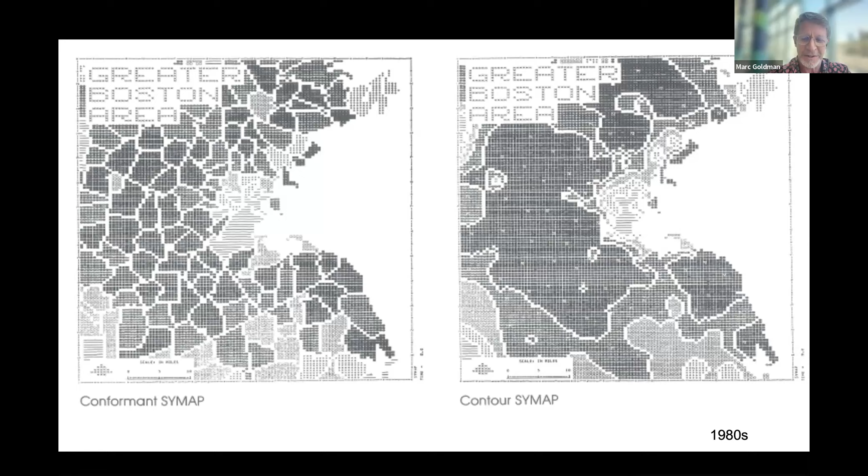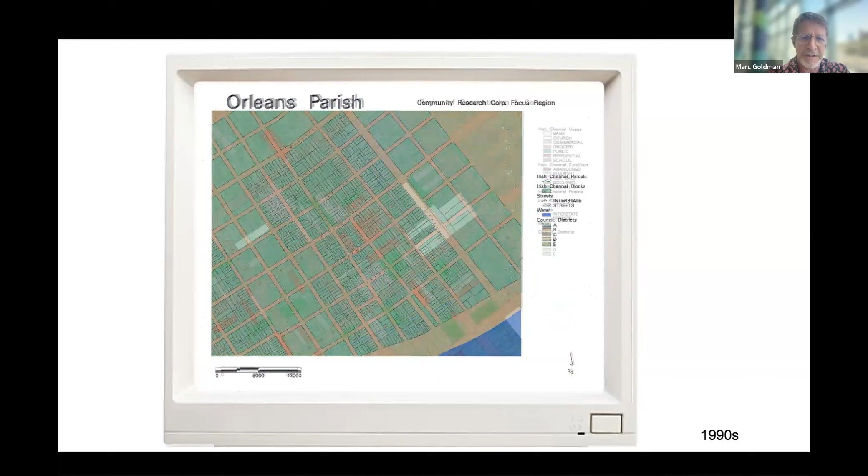Around that same time, I actually got my hands for the first time on GIS. I was in Louisiana - I went to school at Tulane University and was asked to work on a project bringing together CAD floor plans and incorporate them onto some maps showing where properties could potentially be converted from defunct, dilapidated, abandoned properties into

potentially community resources for churches or for schools or for playgrounds. And just the effort to bring the most basic CAD into the time's most probably advanced GIS took weeks, literally weeks of DXF exporting and coordinate resolution and transformations and rubber banding of the images underneath. It was just an absolute challenge.

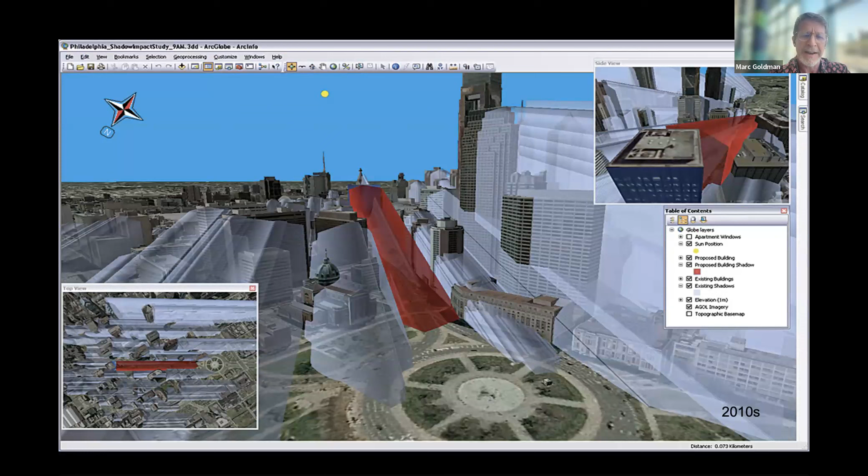Here we are around that same time as CAD started to become more than just basic lines, arcs, and circles and blocks, but actually multiple scales, multi-views, paper space, and model space all combined. In that same era, the 2010s or so, GIS started to get into 3D, but not nearly the quality that we'll see today, and you'll see in some of my examples. Roughly the same time frame.

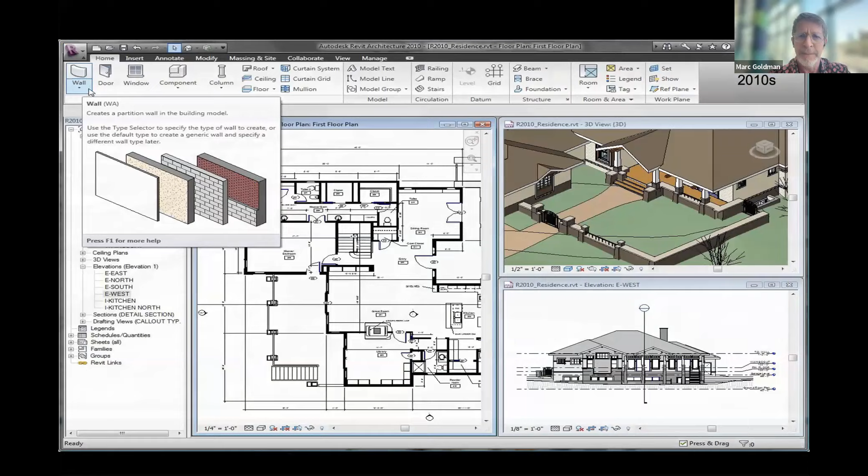My path to GIS was probably like many folks in the AEC industry. It was on the sidelines. You had your heads down in your CAD and BIM and scheduling software, and GIS was at best known to be a mapping tool, but it's come so far in those years.

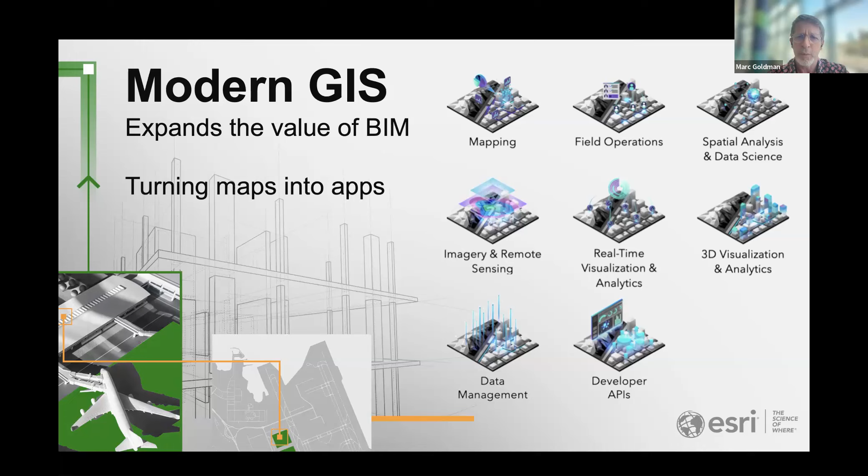We're still generating maps, but those maps become apps, and those apps lead to insights and dashboards and decision-making. We're just so much more than the basic mapping capabilities, as you'll hopefully see from a couple examples that I've shown and more that I'll be showing here. Over the last decade or so, Esri has been investing in integrating BIM with the flagship product ArcGIS.

Beginning with the ability to import through an ETL type of workflow into our main desktop product, ArcGIS Pro, that has evolved over the years as we've strengthened our partnership with, amongst others, Autodesk, who we have a very strong relationship with, and we're reading Revit files directly, DWG files, and certainly IFC files as well.

Those came around just a few years ago, and we have invested significantly in people and energy and commitment to buildingSMART International, buildingSMART USA. I think you'll see in a few examples that I'll show in some live scenes how well we are bringing in IFC data from various authoring applications into our scenes.

And then you're going to see some great examples from Michelangelo from ACCA Software, who's really going to, I think, blow your mind.

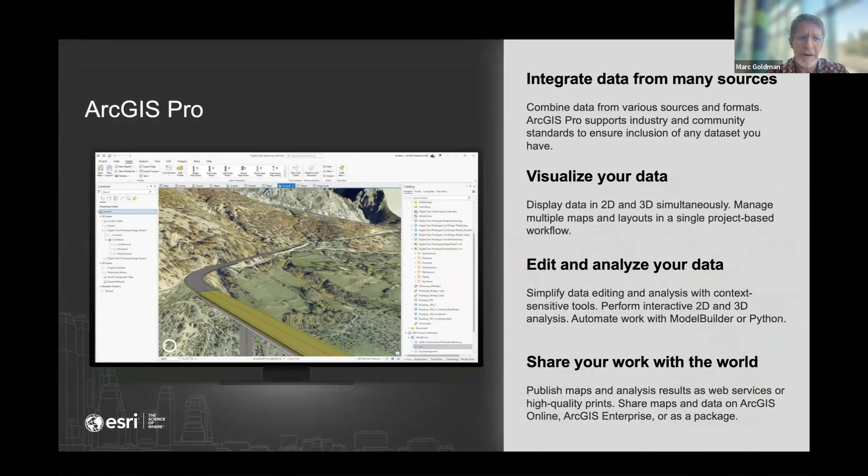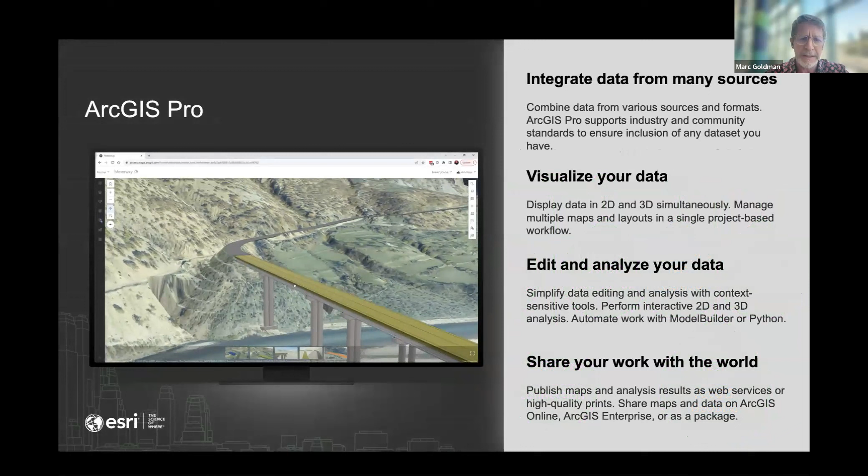So ArcGIS Pro, I've mentioned it a couple of times. My philosophy is if you're using a BIM or CAD application, a product like ArcGIS Pro right next to that, pulling it out of your toolbox to take that CAD and BIM information, combine it with satellite imagery, combine it with reality capture data, combine it with literally thousands of layers of data that you might want to use to understand the project better.

To get a context of your designs in the real world with layers of information, which might typically be non-graphic, census data, traffic flow, weather patterns. That type of information combined with your designs really just opens the door to better visualizations, better deliverables, and the ability to share. We developed a product about 2 years ago now called ArcGIS GeoBIM, which takes the 3D content you might create in the likes of a Revit or other modeling applications.

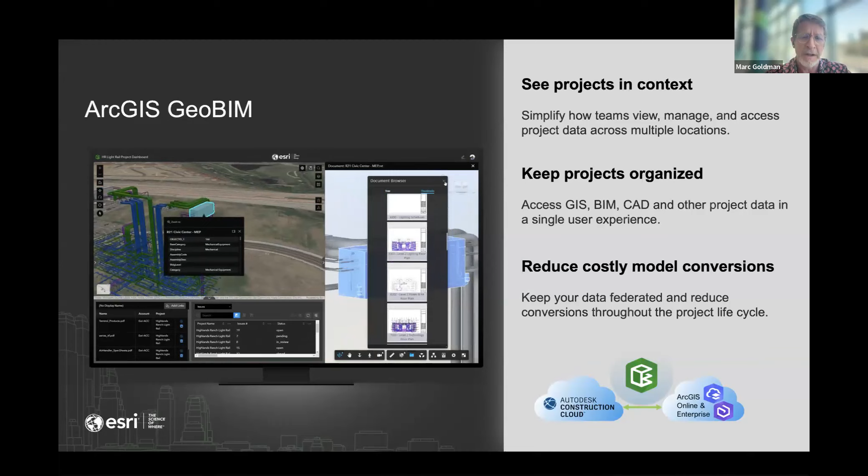And connects the Esri cloud, ArcGIS Online, to, in this case, the Autodesk Construction Cloud or BIM 360, so that on the left side you're looking at a map-like view with all of the context, and on the right side view, you've got the Autodesk Platform Services, the Forge viewer that allows you to interrogate, understand, access all of the other documents that might be connected to your project.

So again, delivering on that concept of digital twin, various layers of information, various scales of information in near real time through a single application that is not just the proprietary formats, but also IFC is consumed and read and understood in GeoBIM.

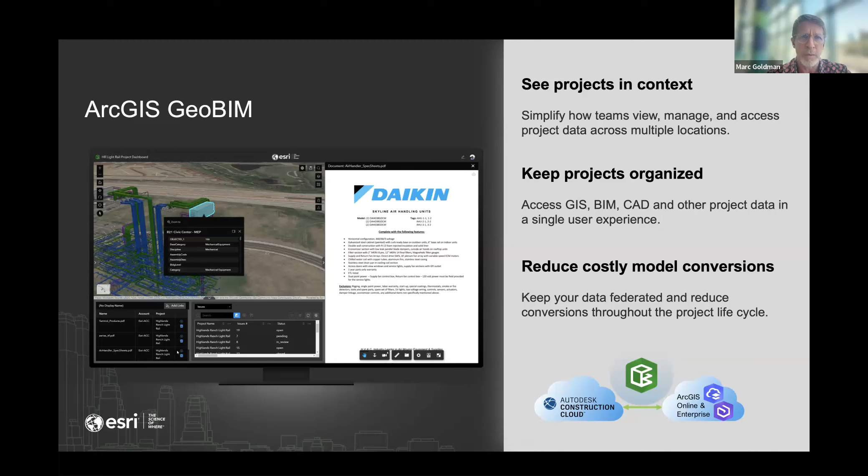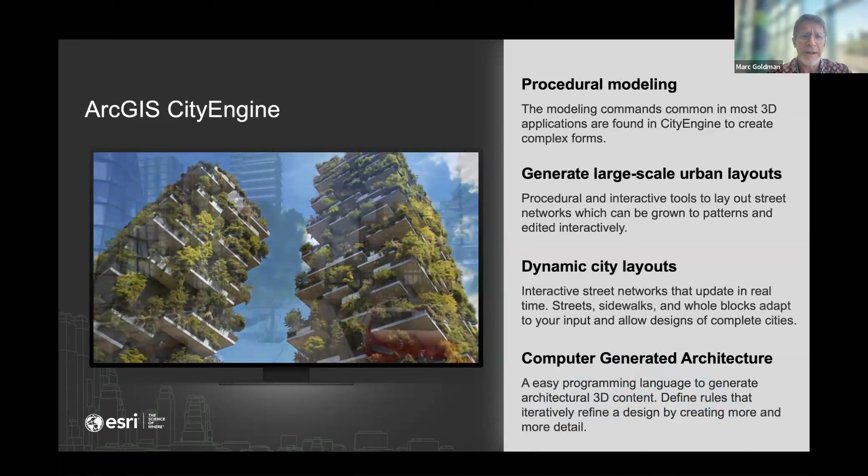And then another application that has really caught my eye at Esri called ArcGIS CityEngine, that is a parametric computer-generated architecture modeling application for city scale, multi-blocks, regions, entire cities, modeled out with parametrics. And it also reads and writes IFC formats, a little bit behind Pro, which is up to 4.3 addendum 1, I believe. CityEngine is still at 2x3, but I'm pushing to make that the latest and greatest, 4.3, 4.4.

So why are we putting this energy into GIS for AEC? I've kind of touched on it, that the context of planning, designing, constructing, eventually operating capital projects, assets are based on spatial information. The idea of these projects existing somewhere along that life cycle is something we sometimes kind of gloss over.

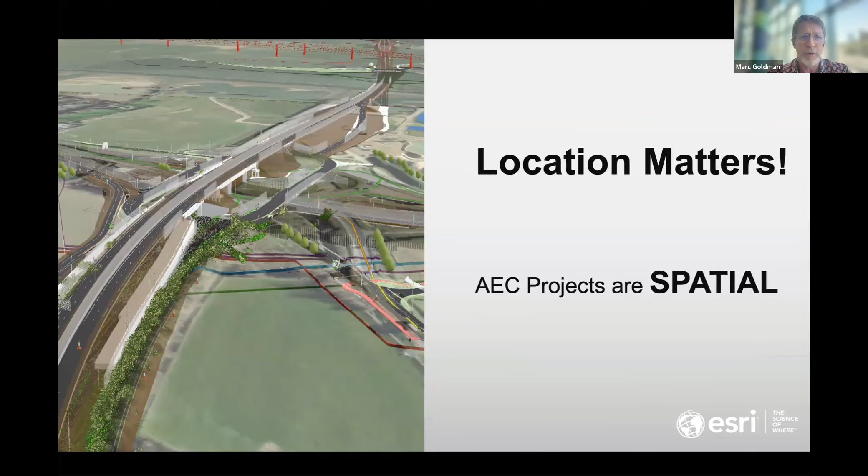The design and engineering tools that typically are used start with a blank screen, but if you could bring in a map, if you could bring in some of those layers of information to help inform those earliest decisions that you make before you put a line on screen that represents a wall or a roadway or a bridge, your first decision is going to be more informed.

GIS also acts as this integrator of content. I can't really think of an industry, a set of professionals who deal with more ranges of information, types of data, complexity of information than those who are involved in building out our infrastructure.

You know, CAD data is very complex. BIM information adds a whole other level of complexity. Schedules that need to be understood in Gantt charts and various types of visualizations. All the PDFs that need to have information extracted from them. Spreadsheets, and I can just go on and on of all the information.

Point clouds, photogrammetry. GIS brings that together, and location acts as a common denominator to bring information into a single view to be analyzed. And what I've seen over the few years here at Esri, I've been at Esri now for about 4 years, is that when you're able to bring data together, you end up bringing people together.

So no longer are you just throwing your information over the fence, hoping that it can be understood as a file, but you're actually connecting around services, web services, data services. It enables, and it requires, a level of communication and collaboration, which is the driving force, I think, of the digital transformation that's happening in this industry.

And I don't just mean going from perhaps paper to dumb PDFs, but actually changing workflows around data and digital workflows so that information is retained and maintained and persists and becomes this golden thread, to use a buzzword, typically related to digital twins throughout the entire project lifecycle.

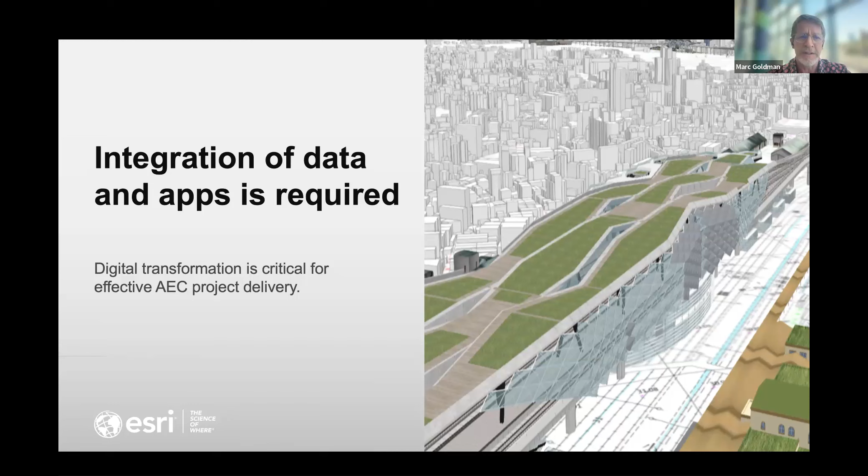And I think that gone are the days of tech shaming our industry, of feeling ashamed for the lack of adoption of tech amongst AEC professionals. I think those days are gone. I've seen it statistically, I've seen it anecdotally, and I've certainly seen it with the solutions that are coming out from Esri and all the partners that we work with.

So with that, I want to jump over to a live app that I put together. This is using a solution called Story Maps that allows you to bring together maps and web scenes and images and videos and timelines, and certainly lots of text to help tell your story.

So what I've done here is I've worked with one of our project engineers who is much more fluent on our software than I am to put together a few scenes, but I actually got to admit, I've done a fair bit of these maps myself.

So this is a scene in San Francisco where I've just taken, picked a region, picked a base map that in this case is imagery, and zoomed in on a portion of San Francisco along the Embarcadero that you can see what I know is Pac Bell Park. I think it's Oracle Park. I don't even know the name of the stadium now.

But I simply chose to use the open source OpenStreetMaps 3D buildings as my base layer, and then brought in an IFC file 4.3 that I believe was generated in Civil 3D.

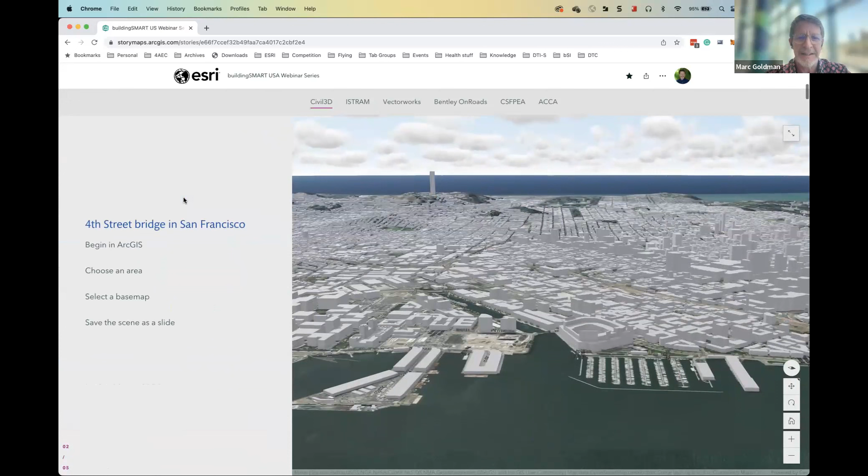Okay, so we're just going to start out. Okay, so here we are. We're in Story Maps, and here's that scene in San Francisco, Pac Bell Park, as I still call it, OpenStreetMaps data. And this is a live scene. This is an actual 3D map that I can interact with as a means of collaborating with my team.

Here we're zooming in on that particular model that I mentioned. And we bring these in through our geoprocessing tools that allow us to simply find a file, quickly import it, and quickly export it into tons of different file formats.

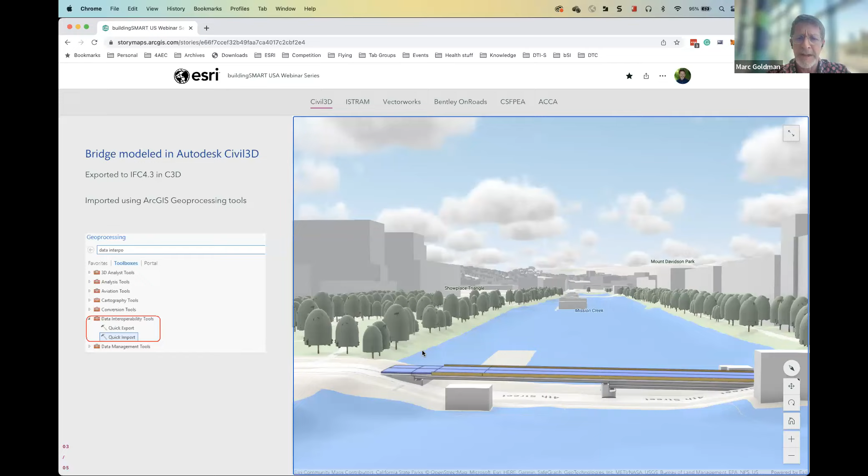GIS tends to be more data oriented than file oriented these days. So we've got this model here that we could look at from different views. We can click on the objects, see the properties. There's not a whole lot of properties on this, it was just a test case, and that's what I'm going to be showing, mostly these test scenarios.

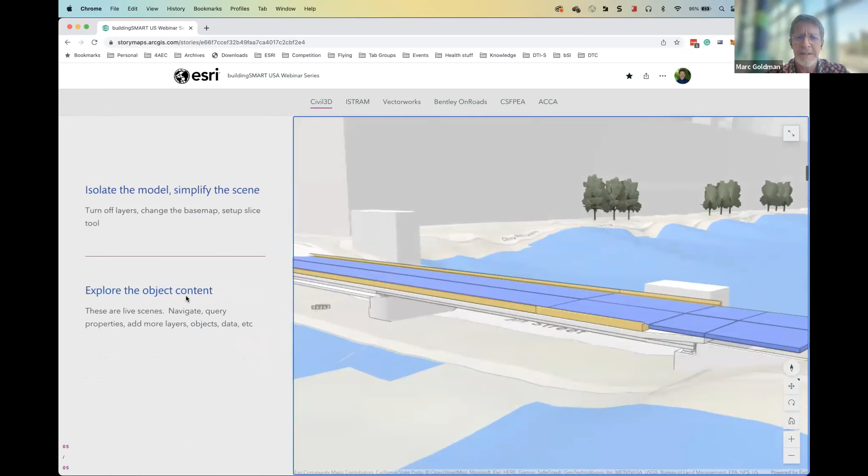I can navigate around my model, turn on and off from the generic trees to the more detailed trees. I can isolate the model, I can turn off the buildings around it. Again, this is a 3D environment, not just a static image, not just a video. I can explore the content. It is a GIS environment comprised of, in this case, IFC 4.3 data.

Here's another model. We went to, a few of us from Esri, the buildingSMART Rome Summit, and prior to that wanted to have some good examples of IFC data brought into our environment. Here we're looking at a similar situation. I happened to stumble across on a webinar, I think it was ISTRAM software, a really great model that I wanted to show. So I reached out to our friends there and said, hey, can you help me get that model? Got it as an IFC 4.3 file and brought it in, did a little digging around, and they actually shared a couple models. This is just one of them.

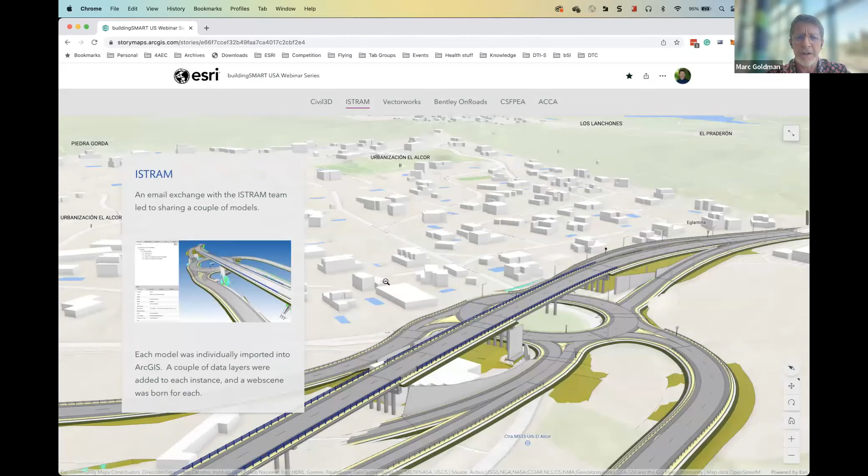You can see here's the model in BIM Collab. This is the model back in ArcGIS as an ArcGIS online web scene. And again, the same kind of capabilities, change my view, change my environment, change my layers, and just come to understand the content the way you would in any kind of BIM visualization tool. GIS has become that as well. And it's not just visualization, I'll get to some other examples.

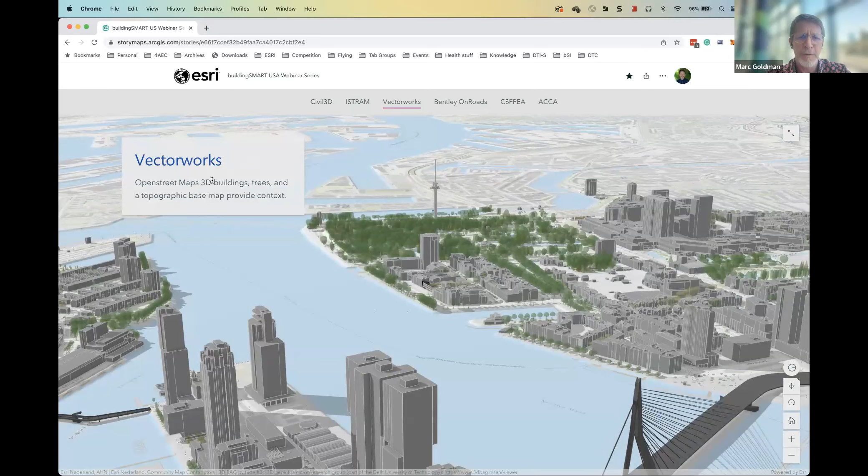Here is a Vectorworks model. We're also partnered with Vectorworks. I was recently in Rotterdam, so this feels somewhat relatable. I biked around the town, asked our friends at Vectorworks for some IFC data, combined it with some OpenStreetMaps data. This I was just working on yesterday, actually, with our project engineer. He just received the file a few days ago. So multiple IFC files are brought in, in this case, from Vectorworks.

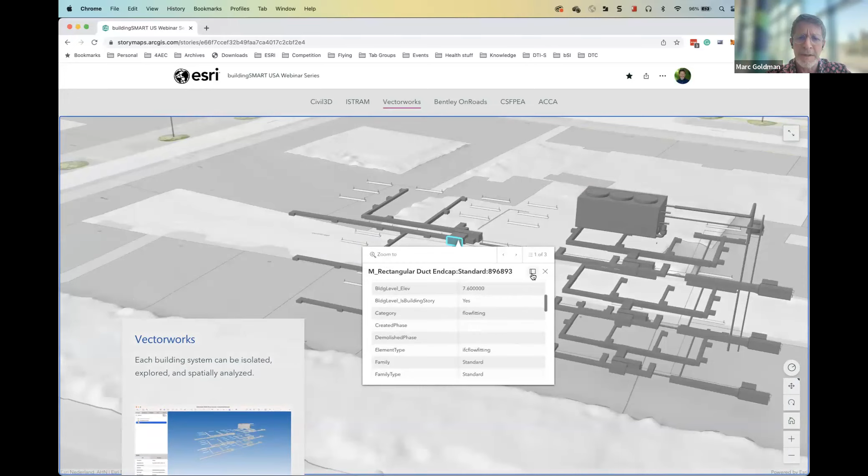Here's what it looked like in BIM Collab, and typical of BIM viewers, there just isn't context to the model, as opposed to what you're seeing here in a 3D web scene. So I've got the structural model, the architectural model, and I think the mechanical model as well, all isolated. And it's just a matter of turning on and off layers, not too different from the way you might do it with AutoCAD. But in this case, these layers are comprised of features. Features make up GIS, and features can be analyzed a whole lot more ways than you could typically do in a CAD or BIM application.

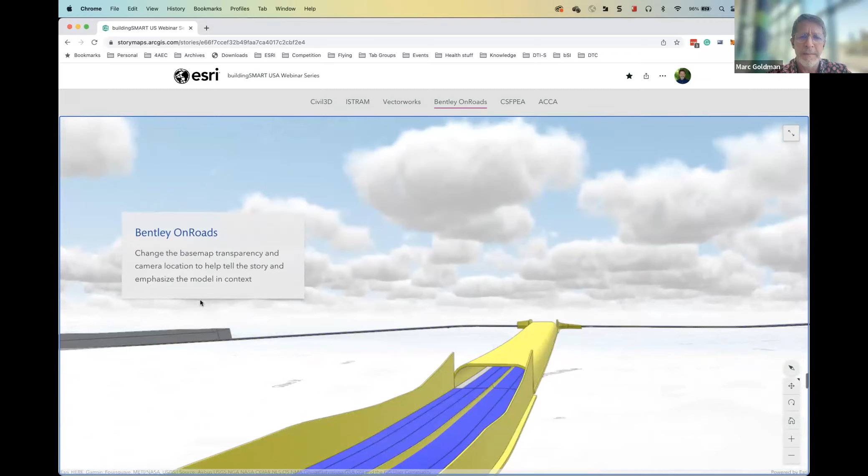We're also working with Bentley. Here's a screenshot from On-Roads, I believe. Again, this is a live model. Turn on and off some layers, change the transparency. In this case, the model was not geolocated, which is often the case with BIM content. It is not geolocated, but it is known where to be located on Earth, so we have the easting and northings. We entered those into our software, and the model gets placed in context, change my views. And again, yet another application where I can just click on the objects and see the properties of those parts and pieces.

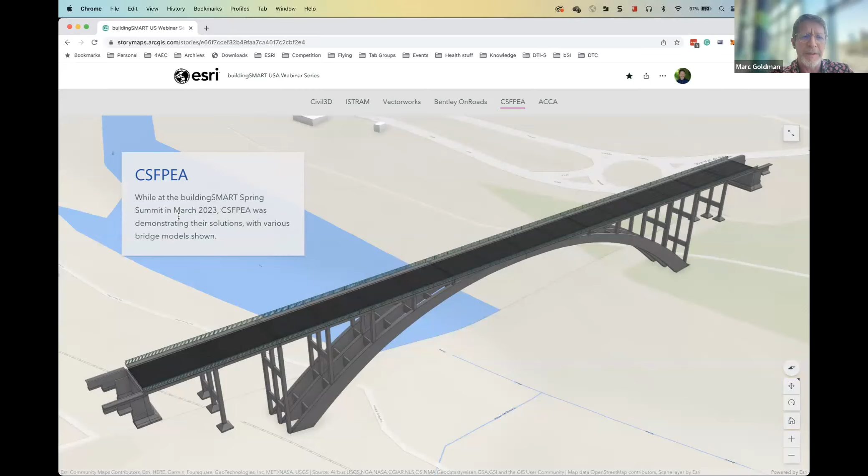Finally, this was an interesting one. Got to Rome, saw a company called CSFPEA, and they had some really cool bridges, I think IFC 4.0 format. So I went over to their booth in their best English and my best Italian. We ended up exchanging a file. They provided an IFC file, let's say on a Monday, and by Tuesday, when I had my presentation, we had this model to show on screen and demonstrate essentially what I'm doing here.

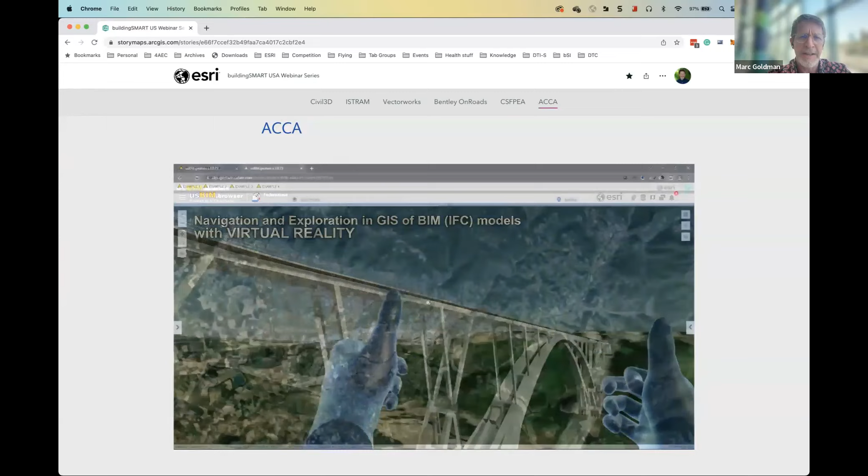Just, you know, being able to highlight the fact that IFC 4.0 content is coming into these GIS environments for exploration. Before jumping over to Michelangelo to show some demos of the ACCA software, I just want to show a little video here, just about a minute long, of them doing some brilliant things, bringing together BIM into GIS views for a whole bunch of purposes. He'll get into that right after me, but I do have a few more PowerPoint slides I want to show before handing it over.

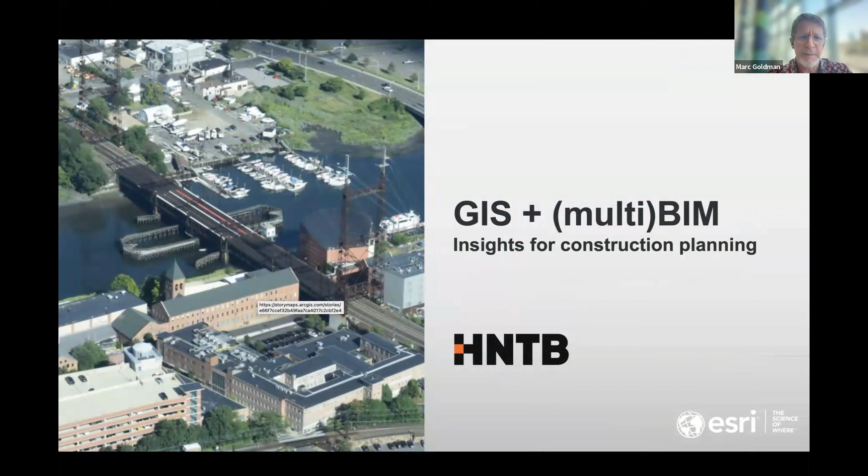One is a company here in the States, HNTB. They have been building bridges for 100 and something years. They had a particular bridge in Norwalk, Connecticut called the Walk Bridge. It's a lift bridge, roughly 80 years old, that they're replacing with a new bridge right next to it. They're doing pile driving next to this old bridge, you can see these little blue sensors that pop up on the screen. These actually represent IoT sensors.

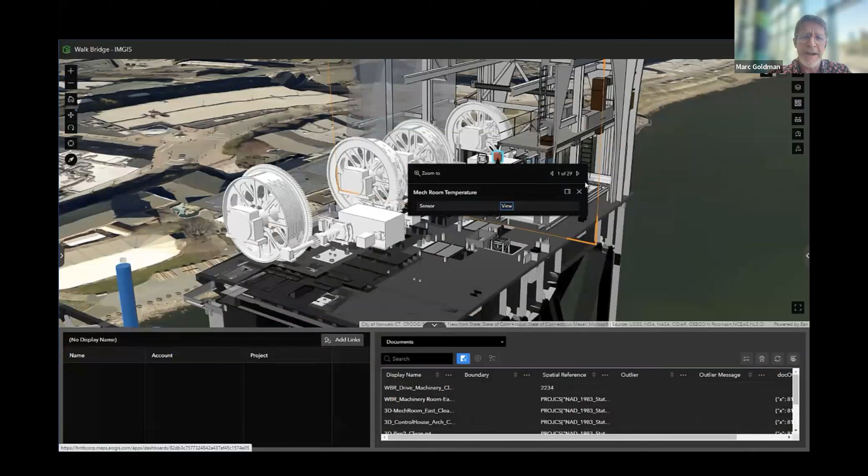So the blue columns represent the height of data coming in from IoT sensors. This is a model comprised of Revit content and DGN content from MicroStation, as well as GIS environment. It's not necessarily openBIM, but it is a great example of digital twinning of sensors providing real-time data in context in a 3D model with GIS information, so that as the pile driving is occurring right next to this old bridge, they can see whether it's creating seismic conditions that should keep project managers from allowing the pile driving to occur. Here you've got temperature data, XY tilt information, seismic data associated with the sensors.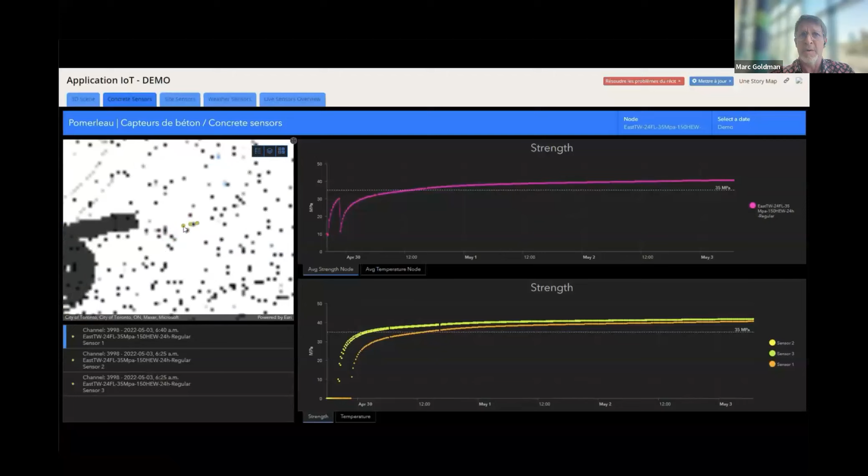Another example, this is GIS plus openBIM developed by Pomerleau Construction. I actually just ran into the project manager on this about an hour ago. Pomerleau is based in Canada. They combine BIM information and GIS views. They put sensors into the concrete so they know the curing strength in real time, so they don't either start raising and erecting steel too soon or wait too long. They know exactly what is going on in their project by combining the IFC models in a GIS environment with IoT data. And by many definitions, that is digital twinning.

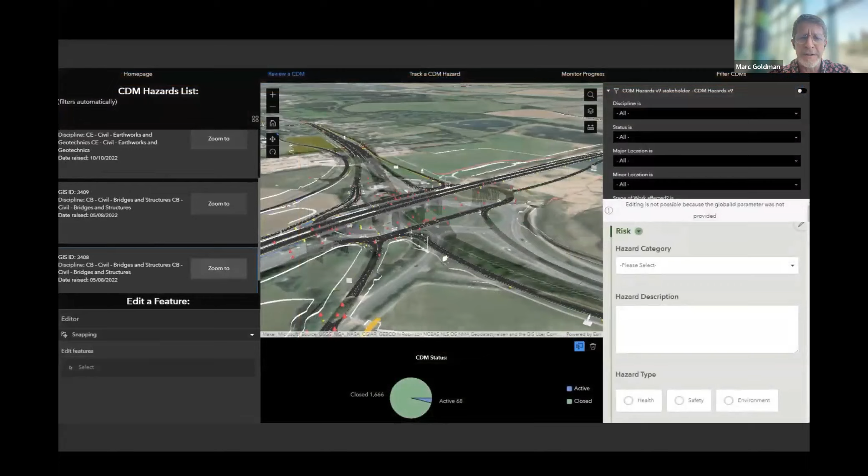And this is one of my favorites as well. Skanska UK infrastructure team bringing together - in this case IFC is their language for translation between AutoCAD-based applications, MicroStation-based applications, and others. They use our tool called Survey 123 to go out in the field and collect existing conditions for construction design management requirements. All these little red dots on the screen show locations where issues were identified in context to the actual design, so they know whether there's a water condition, a soil condition, or any existing concerns they should have before they solidify the design and start construction.

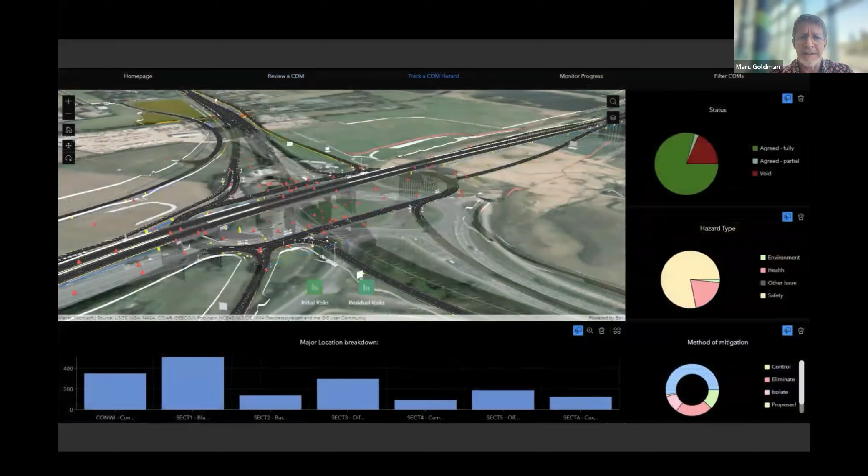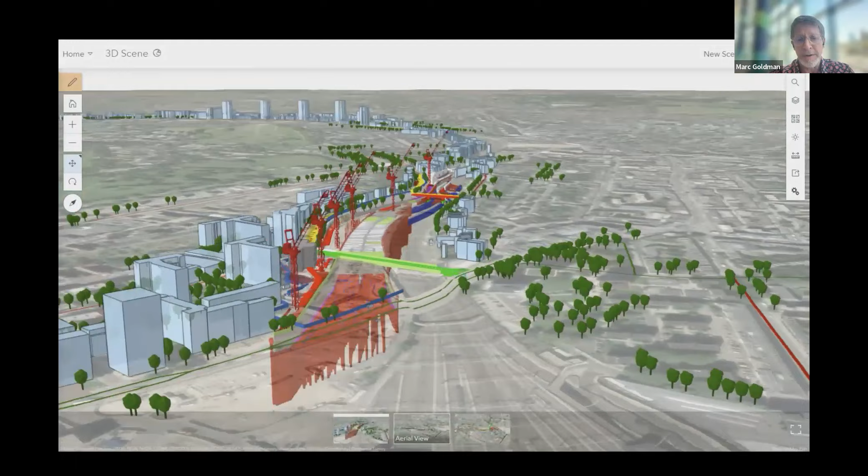So again, I think this complies with most definitions of digital twins - a virtual representation of a physical environment with data that's being collected on a predictable basis at an expected fidelity, helping to inform decision-making. Similar scenario also from Skanska, a different project but similar concept, combining BIM, GIS, sensor data, and field data collected, informing the project team in context in a dashboard that you can navigate as easily as you could navigate SimCity, let's say.

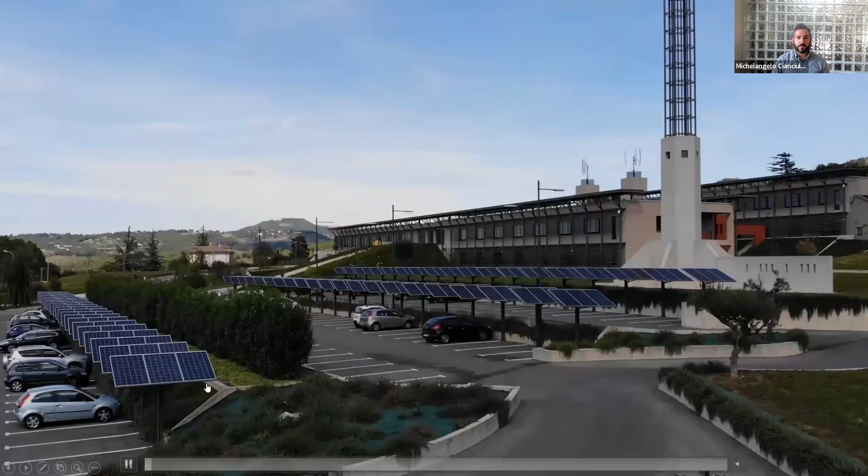Before going into the details, just a quick introduction of the company. Basically, we are located in Italy, in the south of Italy, near Naples or Rome. And this that you are looking at is our new headquarters.

Basically, ACCA was born 30 years ago, and in Italy is market leader for the AEC industry in terms of software. In the last few years, we embraced the openBIM technologies and methodologies, and so we are expanding to the international market as well. We are putting a lot of effort into the openBIM ideas, and we try to develop as much as possible new solutions and integrate existing solutions with the guidelines from buildingSMART. We are multinational members of buildingSMART. We are now over 200 employees, and we have more applications certified for IFC import and export than anyone else. So again, ACCA has been historically present on the Italian market, but we are expanding internationally as well.

Today, among the different technologies that we have, I would like to talk about the integration between the openBIM and the GIS platform from Esri. As I said before, this is very important for us because we believe so much in openBIM that this has been our mission in recent years - to transform BIM into openBIM, because we really think that openBIM is the way to go.

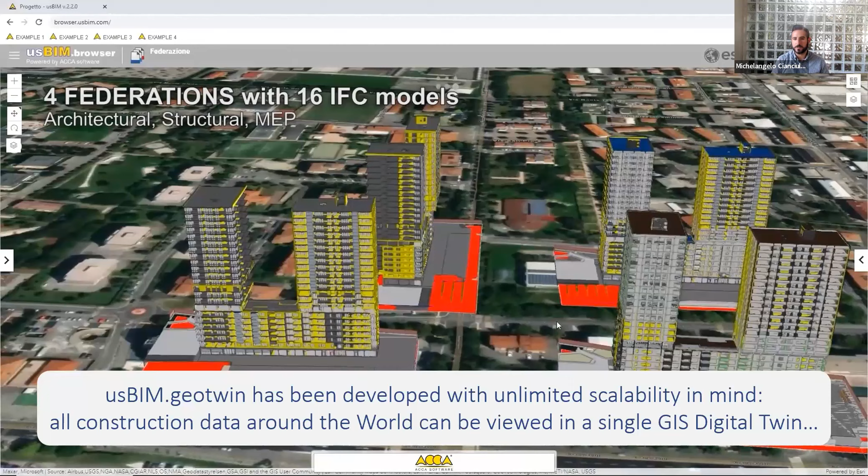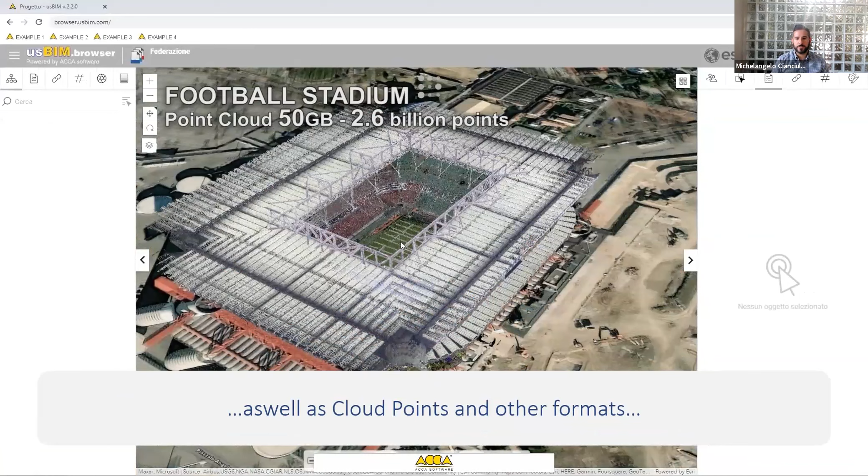In theory, our goal is to gather all the construction data around the world and view it all in a single GIS digital twin. For us, this means having IFC openBIM models, whether of buildings or infrastructure like railways, roads, bridges, up to the newest schema, IFC 4.4, the one for tunnels. We can also handle different file formats for visualization, but the real focus will be on the openBIM IFC format.

Based on what we've seen so far, we can combine different input formats to be viewed together. Here we are looking at a cloud point and an IFC model viewed together in the same GIS view.

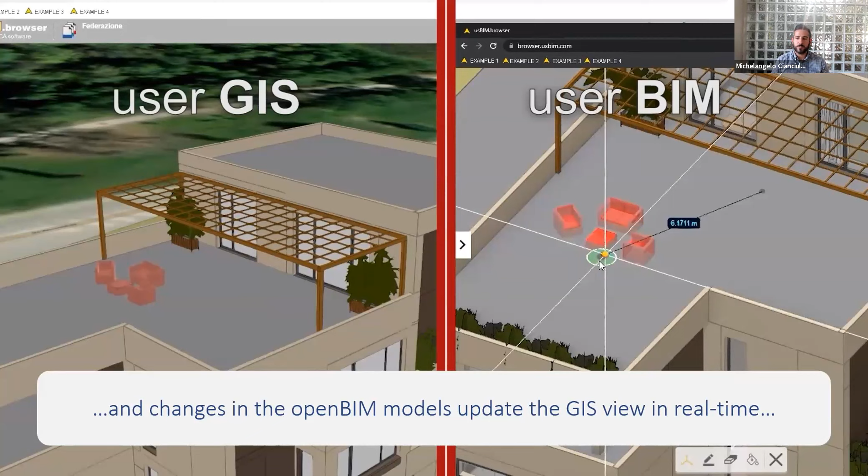This separation of duties is very important because it allows the user to continue doing what they've always done, which is updating the model during the asset life cycle, and reflecting all the changes and updates in real time in the GIS view for the GIS user to query with up-to-date data in real time.

Changes are reflected in real time during the asset life cycle, and whenever there is a need for special analysis from the GIS side, the GIS side queries the BIM models, which return up-to-date data, so the results always reflect the actual status of the building using the latest information.

When you have results from queries based on openBIM and GIS data, you can visualize them in the same environment, combining the BIM and GIS view. Since you have the data, you can run algorithms and data analytics on the data you've gathered.

This is the basis, the foundation, because on top of that, since you have these small building pieces, you can think about more complex use cases.

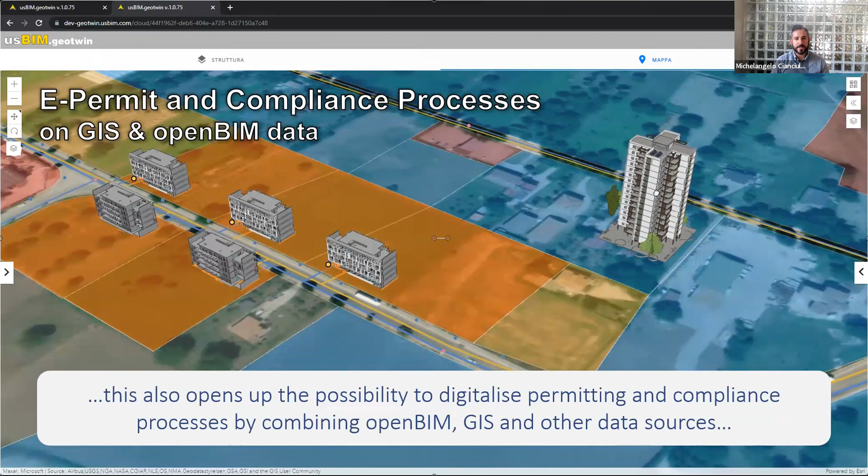One use case we're working on, still in development with a lot of work to do but definitely possible, is the digitalization of permitting and compliance processes by combining both openBIM and GIS data, as well as possibly other data sources, such as data from asset and facility management, or Internet of Things sensors, like we've seen before.

And of course, last but not least, it is possible to navigate the openBIM models directly in the GIS environment with the use of virtual reality.

I would like to show you everything we've seen so far in a video, which I hope will clarify even more and show you all these possibilities in some examples we have prepared.

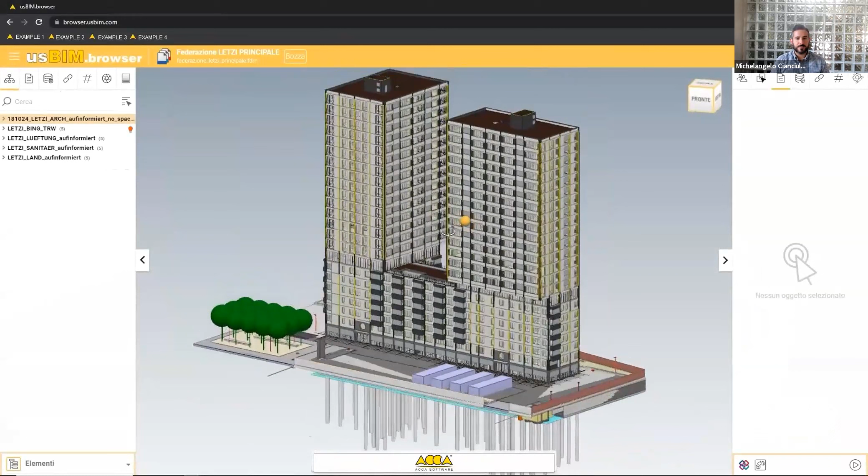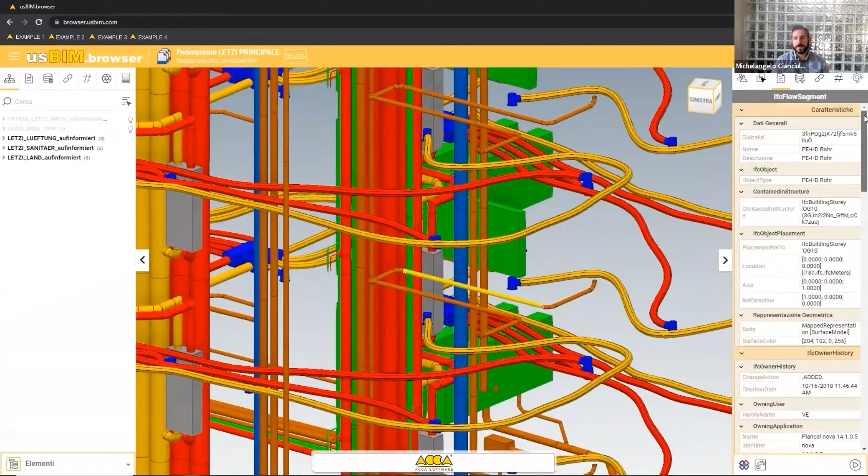Let's start simple by looking at an IFC model on the BIM platform. Actually, this is not a single model, but a federation of multiple IFC models—we have the architectural, structural, and MEP models. Of course, this is an IFC model, which means every object has all of its properties and characteristics.

Then we can put the same model in place on the GIS view, on the GIS map. This is basically the same building that has been copied over and put on a map. Here we can see that you can click on the object and query the BIM system, which will return the properties for that object in real time.

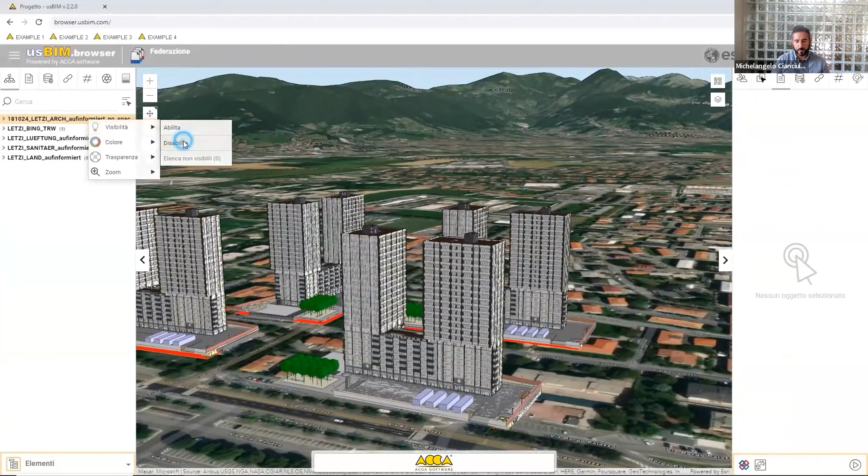So if someone, as we'll see later, updates the model, the result will be different. All the functionalities you can expect from the visualization point of view from the BIM platform, you can also have in this combined view of GIS and BIM.

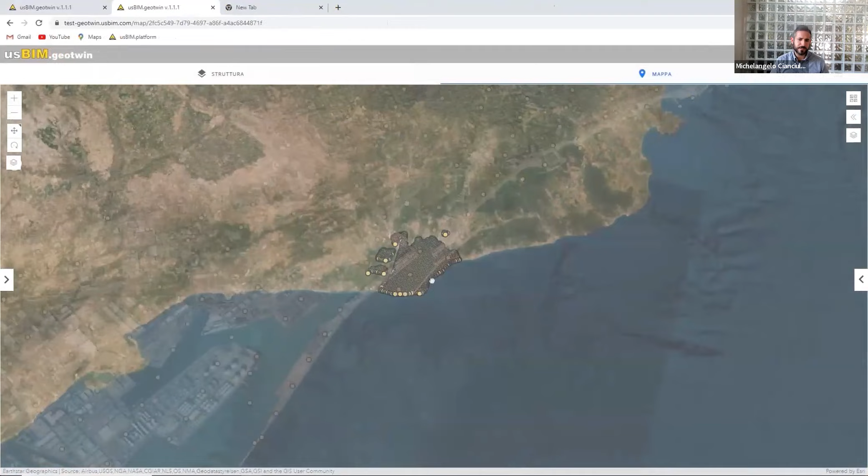So here, basically, you can play with the visibilities and colors and all that kind of stuff. This is another example, quite an extensive one.

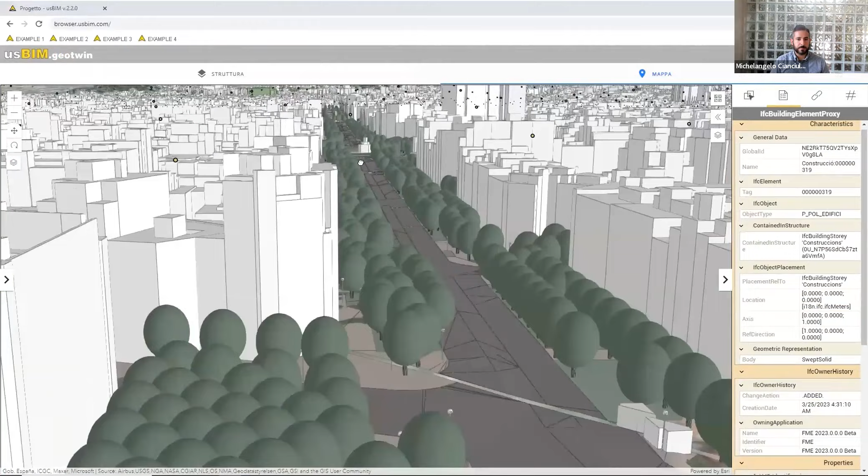This is the city of Barcelona, which has been reproduced in 2000 IFC models. Here you can select each building and see their properties. You can see that the geometric level of detail is not very complex, but of course you can start with this to have this large scale, and then when you have the single and more detailed IFC models for each building, you can substitute the low fidelity model with the complete one, like in this example where we have a complete model for one of the buildings, composed of the architectural, structural, and MEP part.

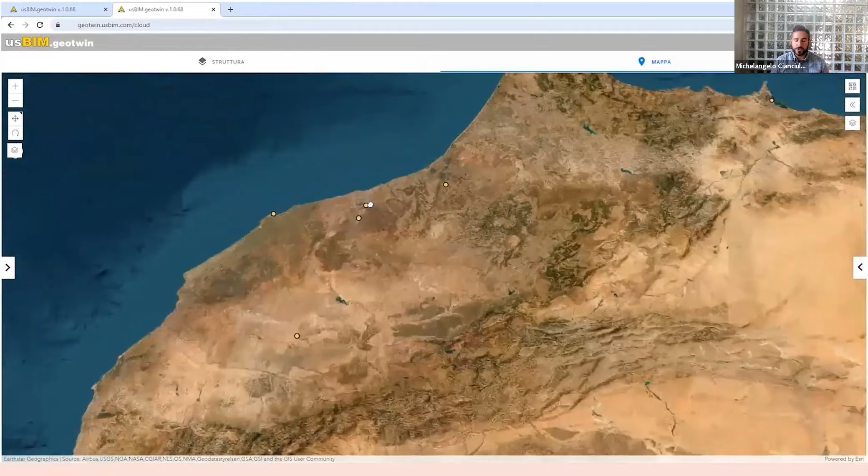So basically, you can think about the unlimited scale of the digitalization. We have seen the whole city of Barcelona. This is another example in Morocco.

This is a bit different because it uses cloud points and texturized meshes. So we are combining different formats for viewing purposes, but in the end, the real data is in the IFC model, which is the one that we are looking at.

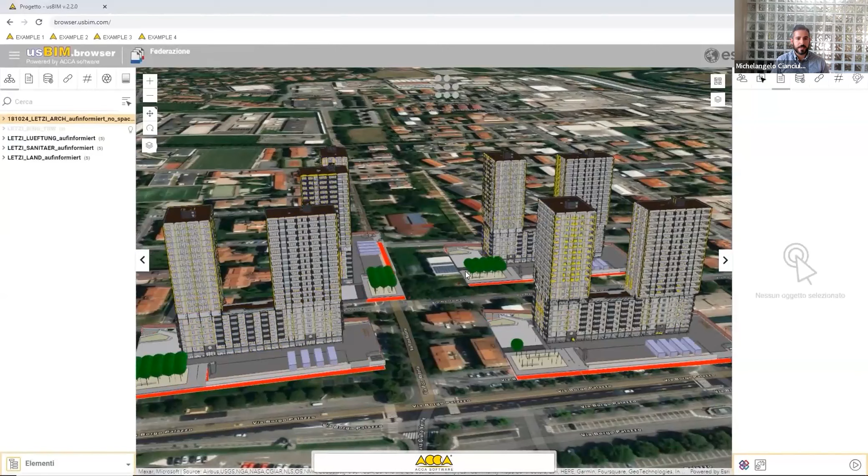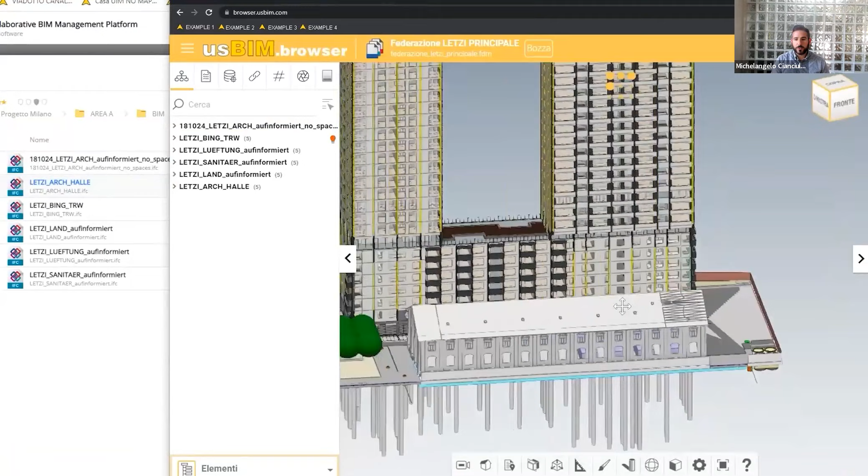Another example here, we start to see some of the use cases that we have talked about before, because as I have said already, the important thing is that when the BIM user updates the model somehow, the changes are reflected in real time. Here is an update of the federation of the models, where we add another building to the scene. We have done this operation in the BIM platform, and the update is reflected in real time on the GIS system as well.

So this is an example. We will see also later on some others, but again, here we are talking about geometry, but also if you update the data, then the model gets updated. And this is very important because here we see that we are starting to combine the data coming from the GIS layers and the openBIM platform.

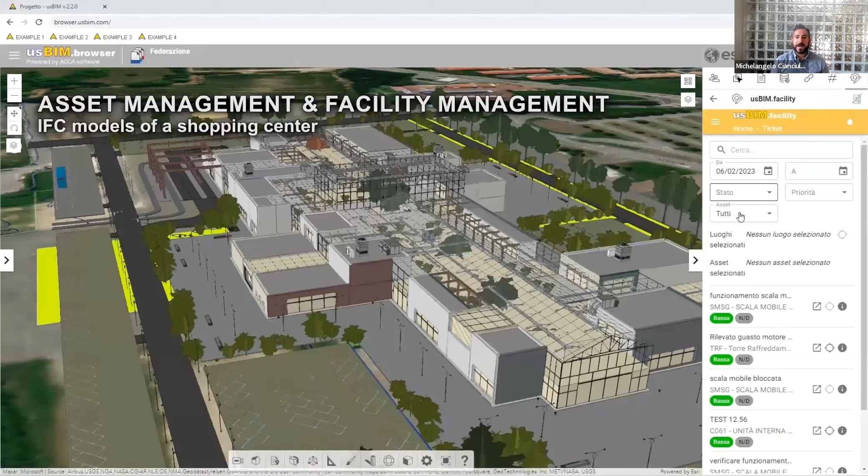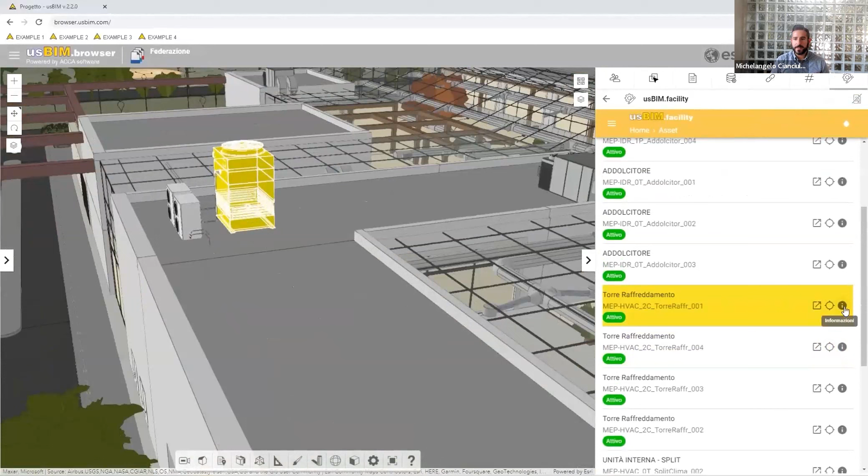Here we are integrating a third system, which is the facility management system. So in the same view, we have the GIS system, the BIM system, and we are talking with the facility management system. We are selecting, for example, one of the assets, and we can query the facility management system to see the tickets that are open, who did the maintenance, when, and so on. And again, everyone is doing their job. There is no copying of data over into the systems.

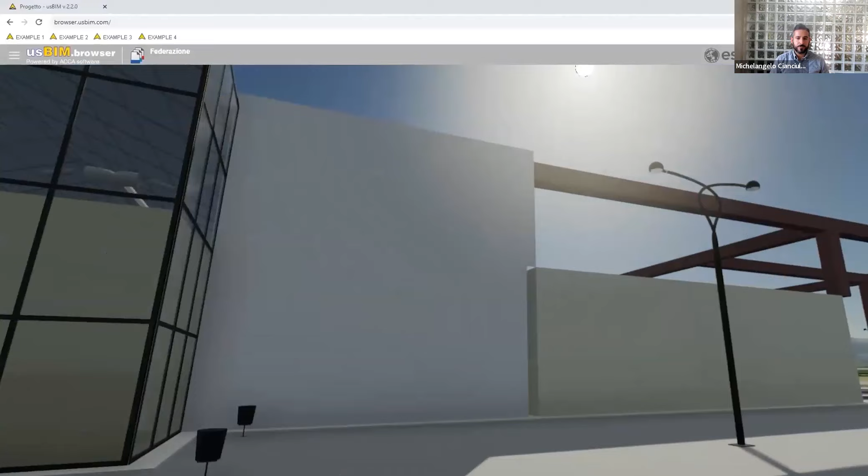So if someone updates the facility management system and you query the object again, you will get the data up to date. And we have seen before the exploration of the models with virtual reality. This opens up a lot of other use cases. The first one that comes to mind is when you have to do some maintenance and you want to inspect the site before actually going. So you can use virtual reality to explore the site beforehand. But there are many other use cases.

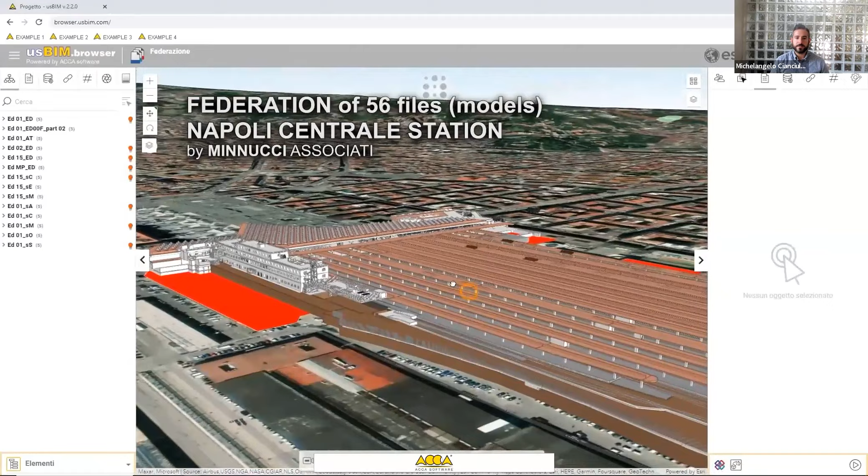We have seen so many buildings so far. It's not all about buildings. It can be also, of course, about infrastructures. This is another example where we have the Naples Railway Central Station. These are 56 IFC models that have been created by Minnucci Associati that reproduce the Naples Central Station.

Again, you can click on each of the objects and you can see that we are connecting to other external information such as images, documents, and so on. So again, we are querying different systems and putting everything in place within the GIS view.

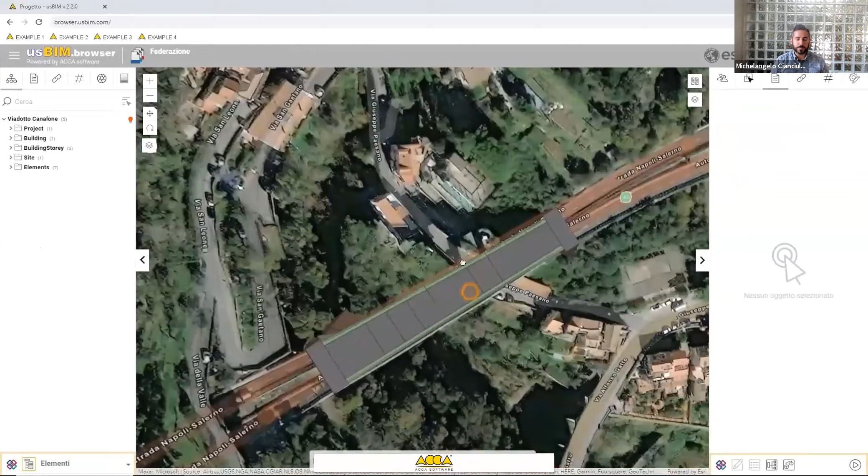Another interesting example is about bridges, and in particular the possibility to use IoT sensors on bridges. So here we are connecting to an IoT system, to some IoT sensors, in which we specify a color map, and since each sensor is connected to one bridge entity, we can actually color the entire bridge based on the real-time values returned from the sensors.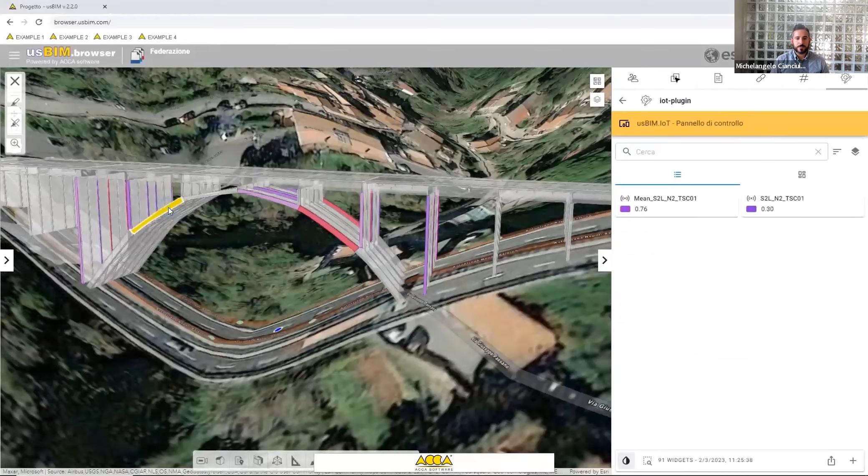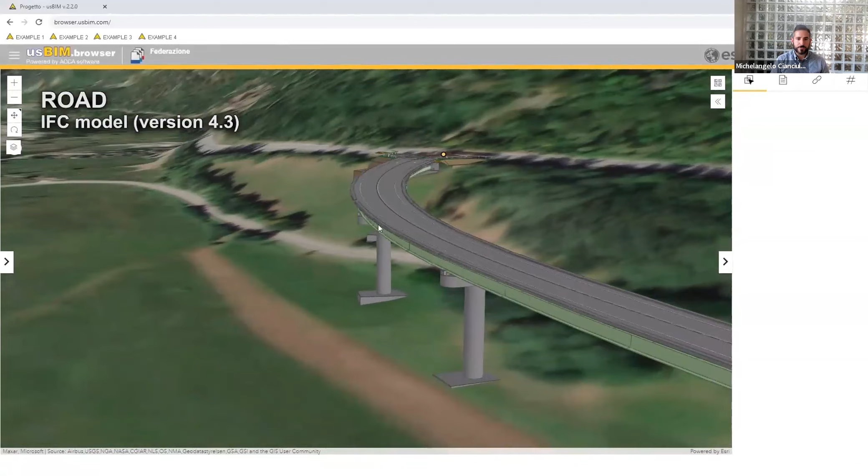There is a lot of research that we are carrying out with some universities here in Italy, and this is a very important topic. You can think not only about the single bridge that you are looking at, but about scaling this to all the bridges of the country, for example. So we are looking at ways to make the data available and to scale on a territorial level. This is another example, using IFC 4.3.

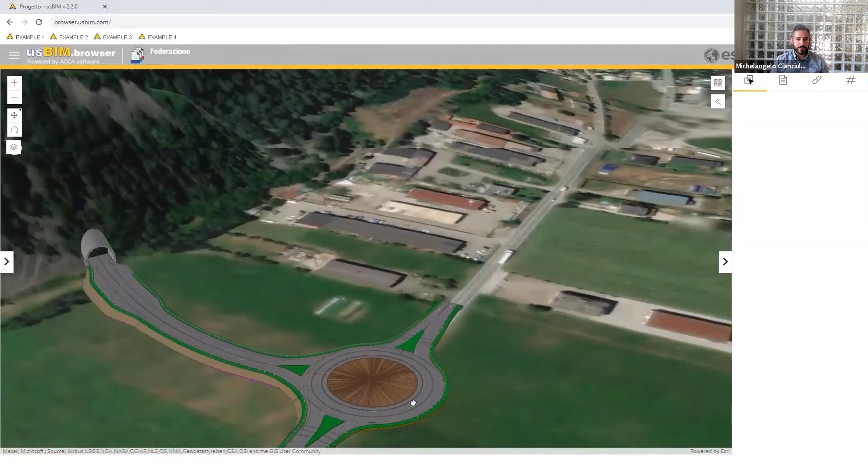This model has been created in the project we did in collaboration with the buildingSMART Italy working group. It is a model of a road, and you have also seen a tunnel with a very low geometry level of detail. This instead is an example of an actual IFC tunnel we are developing in one of the latest working groups from buildingSMART International, about the new version of the standard, which also features tunnels among all the other linear infrastructures.

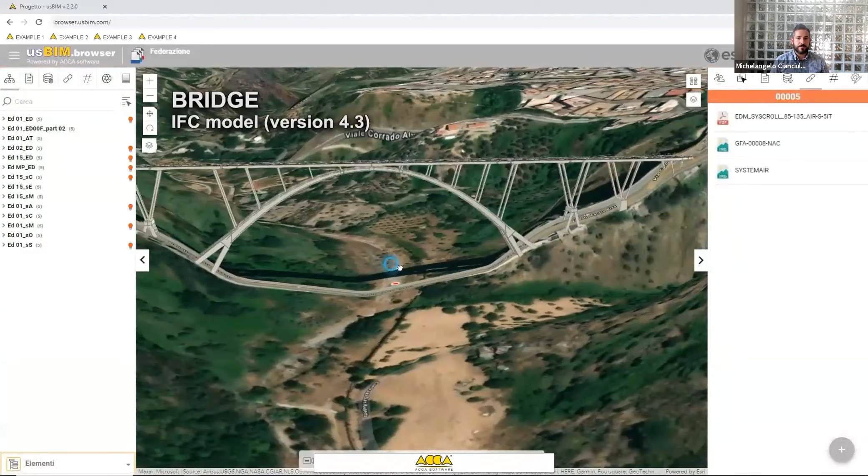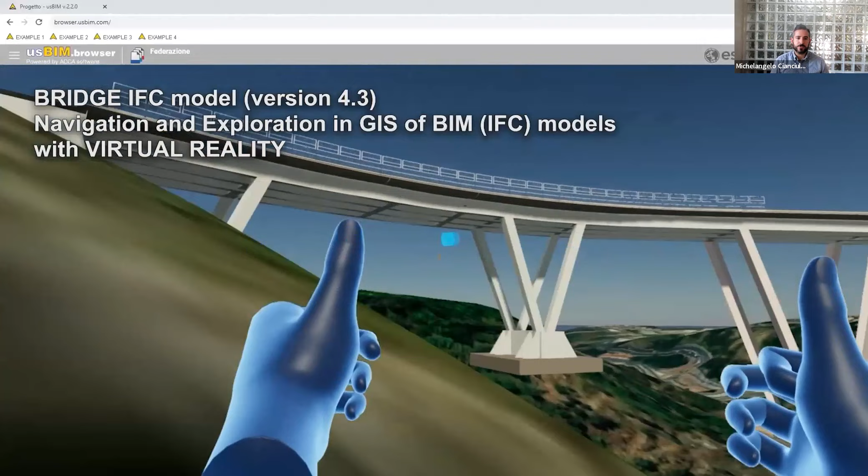We have already seen some examples of bridges. Here is another example, and again the possibility to navigate the environment with the use of virtual reality, so navigation and exploration in the GIS view of the BIM IFC models.

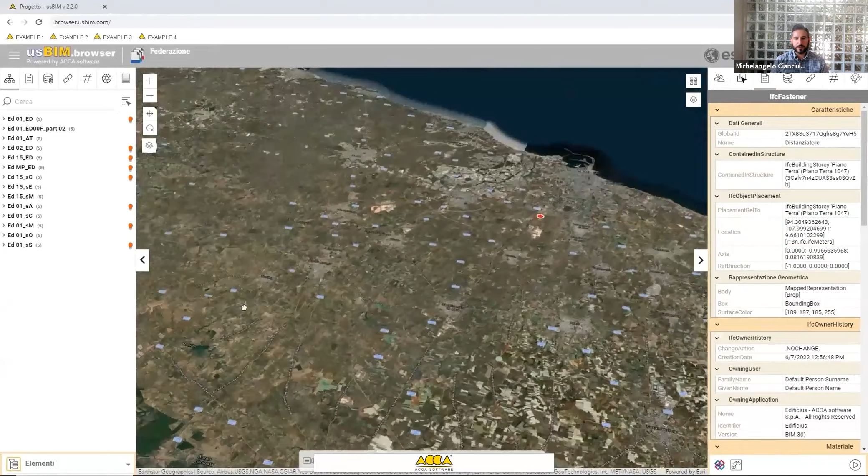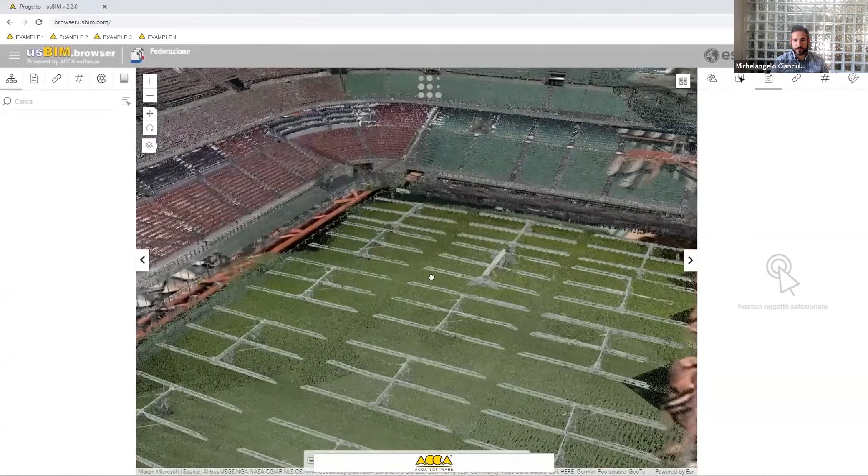One of the cool things about IFC is that you can have very different kinds of assets represented. This is a power plant, for example. But the good thing is that since it's a standard, the data is available in a standardized way, which means the query you do for one model works almost without modification with other kinds of assets as well. This is very important because it means you can have very different kinds of assets and not worry too much about the details of the models. Of course, some modifications are needed, but in general this is one very good thing to have.

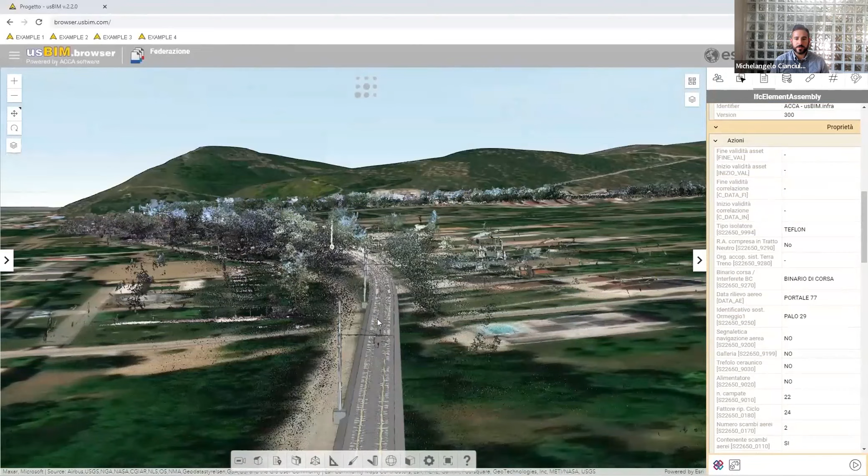We have seen a point cloud of a football stadium before. Now we are looking at a 50-kilometer railway, combining the point cloud with the actual IFC model. So we can always select objects from the IFC model, and we are looking at both the model and the point cloud, navigating the model in this way.

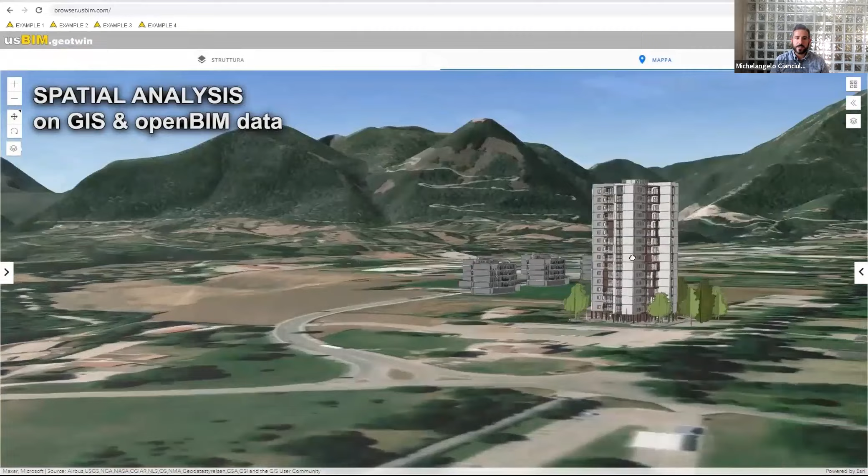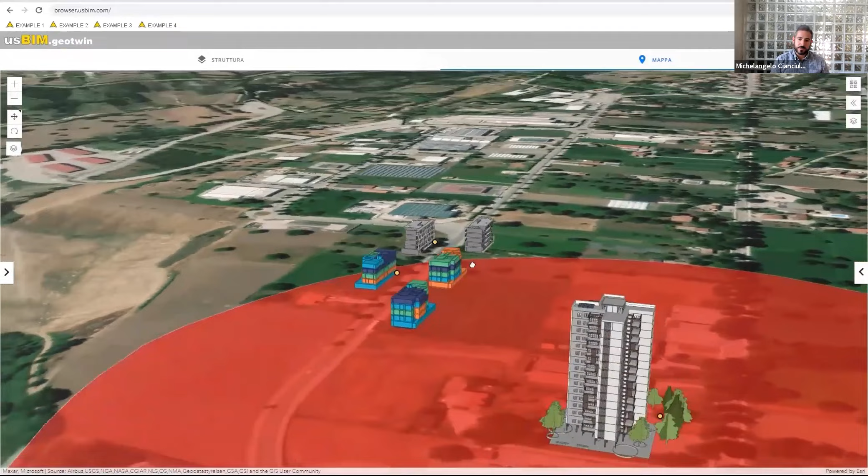I've talked about the possibility to develop complex use cases such as permit and compliance processes. Of course, when you have available the GIS data from one side and the openBIM data from the other, you can think about doing spatial analysis queries. Here we are looking at a simple example where we are querying based on a radius around the building in order to find different kinds of rooms or compartments, and the type of those rooms and compartments. It may seem a simple use case or query, but having the possibility to do that will allow you to build more and more complex use cases.

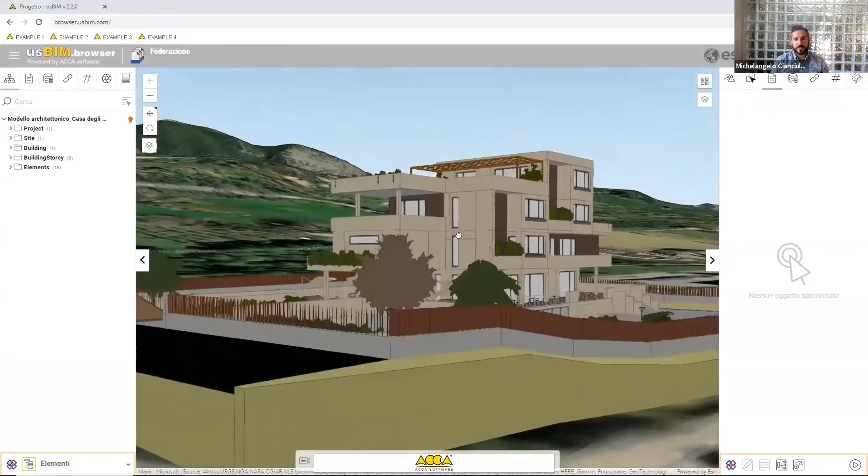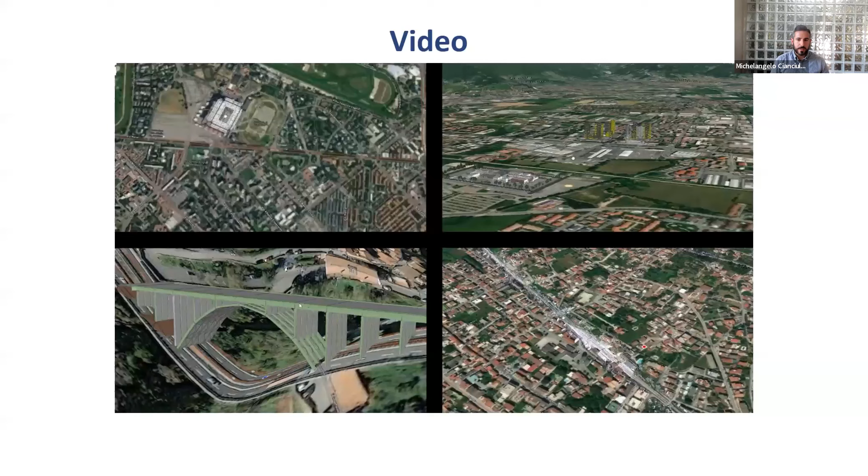I've said this already a couple of times, but I want to conclude again with this: this opens up the possibility for the BIM user to continue doing what they've always done, which is to update the model during the entire asset life cycle. On the other hand, GIS users will see those changes reflected in real time. So it is not a disruptive workflow, but something that enhances the possibility.

So to conclude, what we have seen is the use of GIS maps combined with IFC models and point clouds, in order to do spatial analysis on the GIS and openBIM data, and also by using asset and facility management, IoT, and data coming from other sources. So this is what we think is a digital twin, and the basic use cases we have presented so far. We hope this will open your mind to more complex ones.

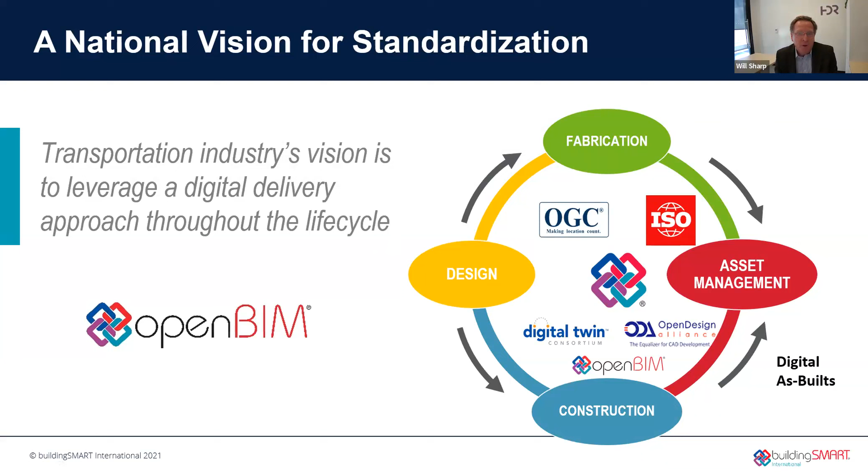So a couple of updates on national progress to data standardization. A lot is going on in the transportation industry in this area. There are 2 national transportation pooled funds that have been created: BIM for Bridges and Structures, and also BIM for Infrastructure. Those are really helping drive things at the national level with the state DOTs. Also, AASHTO, back in 2019 at their annual meeting, adopted IFC as their national standard for the state DOTs. IFC is the ISO compliant, international open data exchange discussed earlier. They also formed a new group called JSTAN, the Joint Subcommittee on Data Standardization, to help coordinate how they're going to implement IFC throughout AASHTO. So that was really foundational to moving ahead.

One other thing I wanted to note: in 2022, the AASHTO Committee on Bridges and Structures actually adopted a national standard for the open exchange of bridge data. This was for the use case to go from design to construction, and all 50 state DOTs balloted and adopted this national standard, which will be based on IFC. So great progress there on the national side.

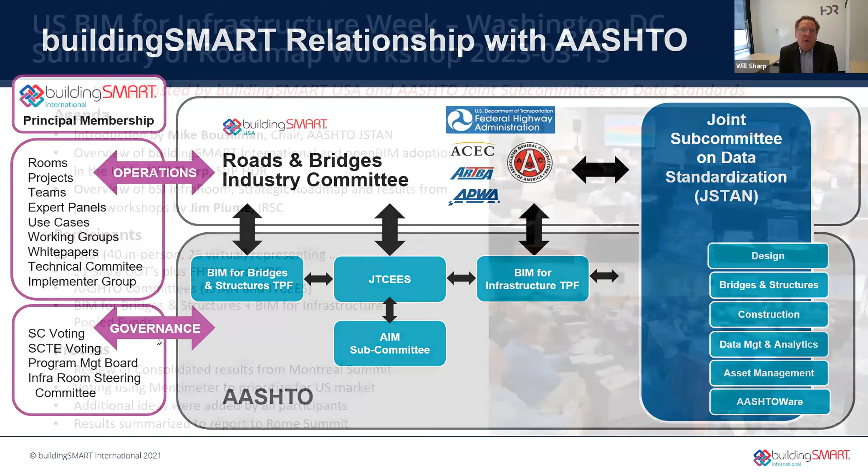One of the key things I wanted to highlight was an openBIM workshop we had at the FHWA BIM Week earlier this year in Washington, D.C. We had a half-day workshop briefing representatives from 21 state DOTs and Federal Highway Administration on where buildingSMART International is going with the Infra Room and the infrastructure roadmap, and really also getting U.S. input to that roadmap, which we're using for the next 5 years. This was a great interactive process to present ideas from other countries and get U.S. input. I know Mike Kennerly presented a summary of this input at the buildingSMART International Summit in Rome earlier this year. So it's great to see AASHTO and the U.S. transportation industry really getting more involved with buildingSMART USA.

And this workshop, by the way, was jointly hosted by buildingSMART USA and the AASHTO JSTAN Committee.

I also want to highlight some of the groups we're working with: the Roads and Bridges Industry Committee, the main AASHTO committees, the JTCEES and JSTAN committees. We've been working with the Federal Highway Administration, with David Unkefer, Katherine Petros and others, the AASHTO Transportation Pooled Fund projects, the National Institute of Building Sciences with Roger Grant and his team, and many other industry groups such as ACEC and ARTBA. We're really seeing a lot of good synergy and momentum around openBIM and open data standards with these groups.